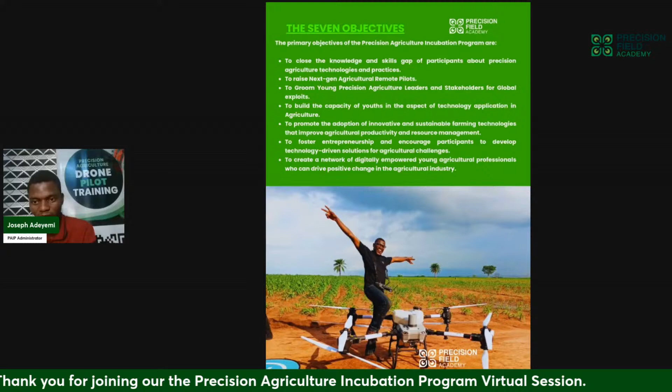Number five is to promote adoption of innovative and sustainable farming technologies that improve agriculture productivity and resource management. Number six is to foster entrepreneurship and encourage participants to develop technology-driven solutions to agriculture challenges. And lastly, number seven is to create a network of digitally empowered young agricultural professionals who can drive positive change in their community through the transformative power of technology.

This program falls into two tracks: the employability track and the entrepreneurship track. So there are two sets of people attending this program. Maybe young farmers who are interested in digital agriculture and have been using Earth observation technologies like Google Earth, Google Earth Engine, and satellite imagery, looking to expand their knowledge on precision agriculture. And secondly, people who want to be employable and possess the requisite skills needed to make them valuable and competitive in their career or industry.

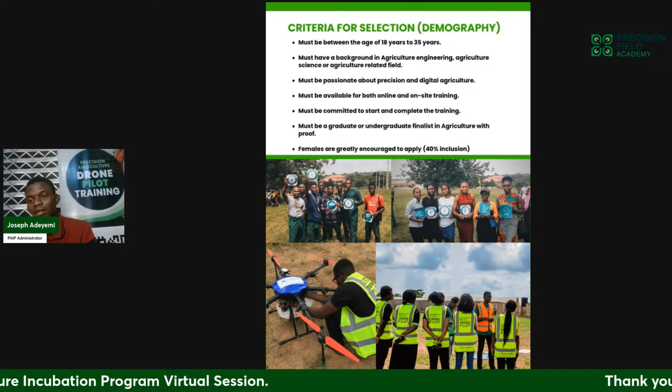So we have the mode of training, which is virtual and in person. For virtual, we have virtual facilitation sessions like this, with online trainings from global faculties around the world. And we have the on-site training, which is the practical field experience, where you get to learn about drone technology, have hands-on experience on simulators, drone building, and some other practicals.

The demography of people we're looking at is 18 to 35 years, because we believe these are still young people, and we need to build the capacity of young people, not old people, but those who can actually visualize a positive future for the future of work in agriculture.

So our focus area number one is drone technology. We're going to be looking deeply into drone technology. Tomorrow we will also have another section on drone technology, which is going to be talking about crop protection, basically, and it will be handled by the convener of the program, Mr.

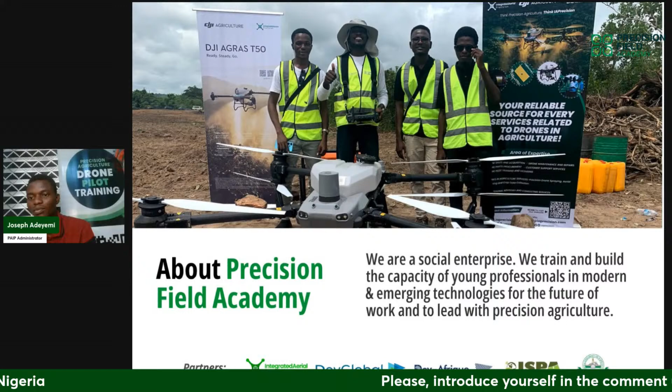We have a core three methodology. Number one is education and knowledge sharing. Number two is training and skill development. Number three is coaching and mentorship.

We have six tech skills in focus. Number one is drone technology. Number two is GIS and remote sensing. Number three is data science for agriculture. Number four is robotics and Internet of Things. Number five is artificial intelligence and machine learning. Number six is enterprise development. All of these skills combine both technical and enterprise skill to make you competitive and valuable in your industry.

So why do we do what we do? What's our motivation for running Precision Field Academy to build the capacity of youth? We understand that there's a skill gap that needs to be closed, and young professionals need to build skills in both technical and enterprise aspects for the future of work in agriculture.

Number two, observing the trend is not enough. Youth need to be an enabler, directly involved in this technology rather than just being mere observers. Lastly, technology is the key to unlock African agricultural potential. We can bank on technology to spearhead our productivity and increase efficiency in the agriculture industry.

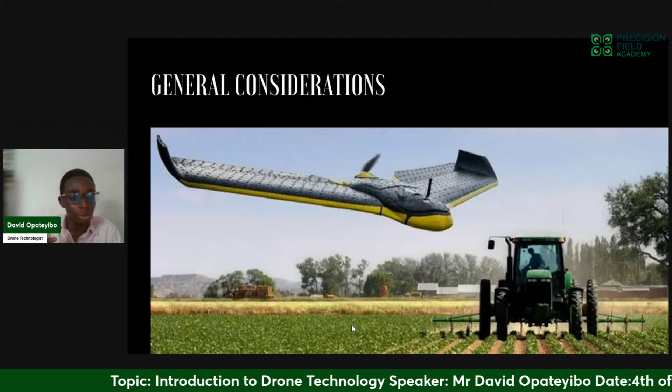We are talking about a machine that actually flies, and most of them are pretty heavy. You can have a drone that weighs over 25 kg. Imagine that drone falling from the sky because the person operating it doesn't understand the regulations or things he needs to do to fly safely. That drone falling to the ground can serve as a projectile, can cause injury, can cause death, can cause damage to properties.

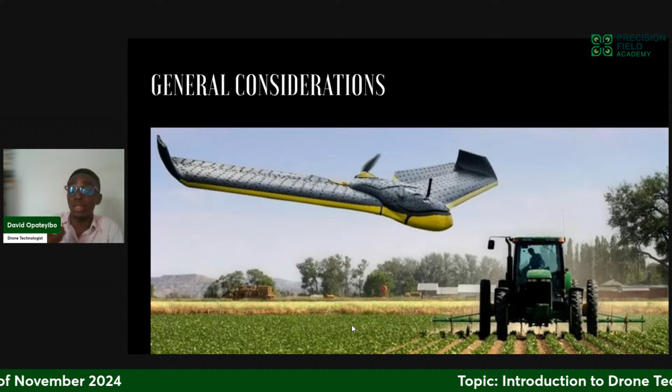So it's always important for you to understand the regulatory framework. These regulations are put in place so that people can safely operate drones without causing injury to themselves or other people, and without causing damage to properties around. So let's look at some of these regulatory frameworks.

When it comes to drone safety, we have general regulations and general laws that apply based on the country that you are in, and special regulations too. General regulations include not flying above 400 feet, not flying closer than 150 meters to buildings, not flying further than 500 meters away from yourself so you can see the drone - that is, flying within visual line of sight.

Not flying close to airports where we have other aircraft, because there's a possibility that your drone can impact the aircraft, maybe damage the engine because you flew towards an aircraft that's currently flying or operating. And many more - so there are quite a number of laws and regulations that apply to the use or flying of drones.

Now, regulations vary from country to country, region to region. So while we have generic rules that apply to the operation of drones worldwide, there are some peculiarities based on the country you're operating in. For example, in the US, the aviation body in charge of regulating drone operations or flight operations is called the FAA, the Federal Aviation Administration.

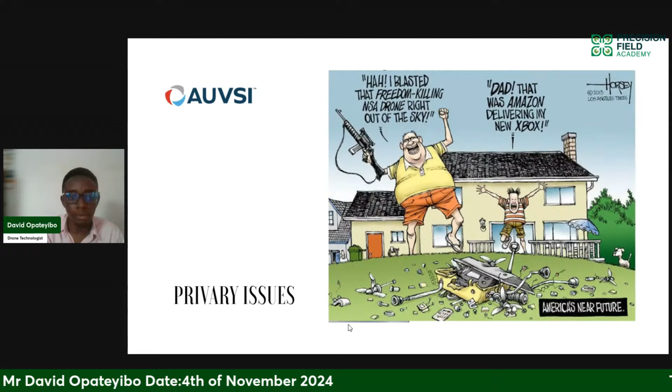Now that brings us to the next thing, which is technical considerations when it comes to drones. Like we already said from the beginning, drones are being used for a lot of things, and we have different categories of drones, different types of drones, and different use cases. So let's dive into the technical aspect of drone technology.

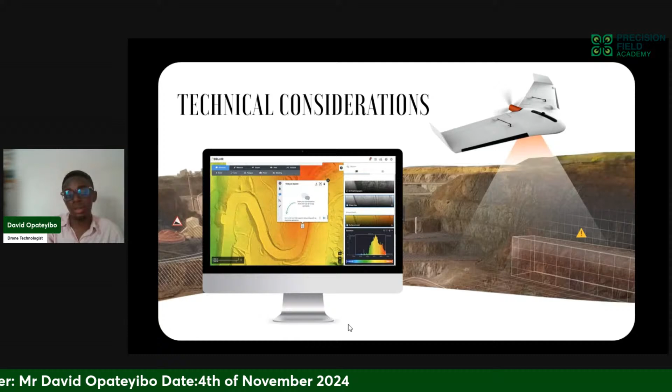Now, when it comes to drones, drones are also known as UAVs. By UAV, we mean unmanned aerial vehicles. So, for example, when we talk about aircraft in the airport, we're talking about manned aerial vehicles. By manned aerial vehicles, we mean that the pilot, the person controlling the aircraft, is inside the aircraft, so the aircraft is manned. But if the person is not inside the aircraft, it is regarded as an unmanned aircraft.

Now, this unmanned aircraft, that is the drone, is actually a subset of an entire system. The system consists of the drone itself and also the navigation system, the communication system, among other things. Drones can be divided into several parts, right? So you have your airframe, your propulsion system, which helps the drone to move, your power system, that is your battery, your communication system, your navigation system, like the GPS embedded into the aircraft, among many other things. So the drone itself is just a sub part of a major framework.

So your major framework now includes the drone, the control system, that is your GCS, your ground control station, and the data link, which is the communication system between your drone and your GCS. But then the drone itself can also be divided into subsections, like the body, the flight controller that allows the drone to carry out the operation, the payload, which is what the drone uses to do work, right? You have your power system, which powers the drone, among many other things.

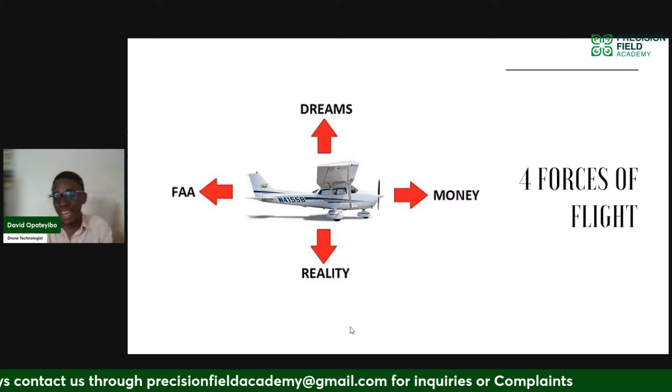Now, these forces are your dreams, your money, FAA, and reality. No, I'm kidding. All right, so we have four forces, and these forces are lift, weight, thrust, and drag.

I'll say it again: lift, weight, thrust, and drag. These forces govern how your drone moves through the air and maintain stability during flight. They are a sub-part of what we call aerodynamic principles.

Aerodynamics is simply the study of how objects react with air, or how air reacts with an object, how objects and air react relative to one another. So you basically have an object, it could be your drone, it could be your hand, it could be your phone, whatever it is. The way it reacts to air when they move relative to one another is what we call aerodynamics.

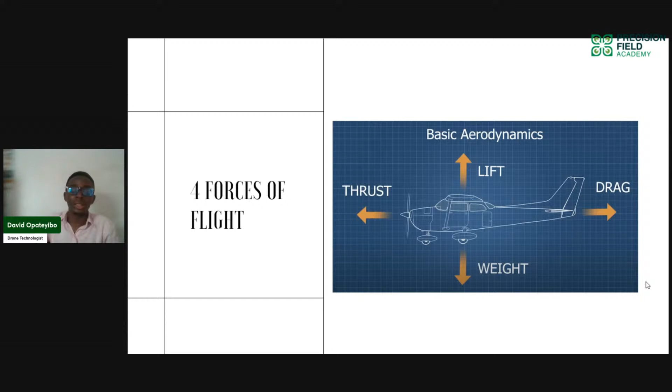Maybe you've been on a bike before, or in a vehicle, and you put your hand outside, and you see that as the car speeds towards the front, your hand begins to move backwards. The study of what is happening there is what we call aerodynamics, simply put.

Now, like I said, we have lift, weight, thrust, and drag. Let's talk about lift. Lift is simply an upward force that pushes the aircraft above the air. So what makes this drone, for example, move from the ground up, is what we refer to as lift. For drones like the one I have here, this lift is generated through the propellers. For airplanes, the lift is generated through the wings, the fixed wings of the aircraft. And for helicopters, it is generated through the rotor blades, that big blade that rotates above the aircraft.

Lift is created through a combination of forces, or a combination of principles. We have what we call Newton's third law of motion, and we have what we call Bernoulli's principle. Those are the two principles we can use to explain how lift is generated.

So let's first start with Newton's third law of motion. How many of you are science students here? Can anybody tell me what Newton's third law of motion says? You can write it in the comment section. What is Newton's third law of motion? Anyone? Okay, not to waste time.

Newton's third law of motion says that for every action, there's an equal but opposite reaction. Action, reaction, action, reaction. For every action, there's an equal but opposite reaction. Let's take this drone for example: by the time these blades begin to spin, because of the way they are tilted or designed, that design is called an airfoil. They have an airfoil cross section.

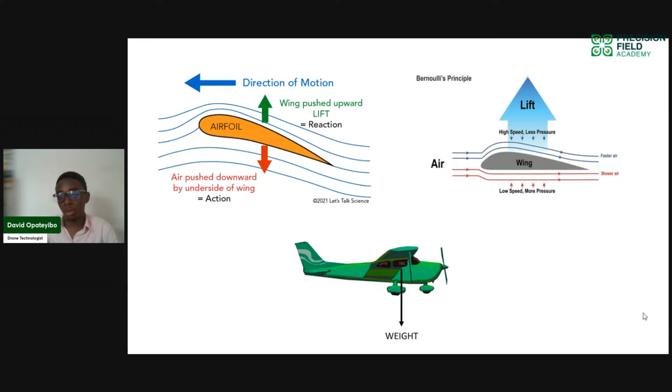Imagine a fire incident in a house. You're ten people in a room with a tiny door. Once the fire alarm goes off, all of you rush toward the door at the same time. Because you're all pushing through at once, your speed is slow, and you won't pass through easily. But even though your speed is slow, the pressure on yourselves and the door increases. If instead you went in a straight line and exited one by one, you'd pass easily without touching the door, moving faster without applying pressure. That's simply how to explain Bernoulli's principle.

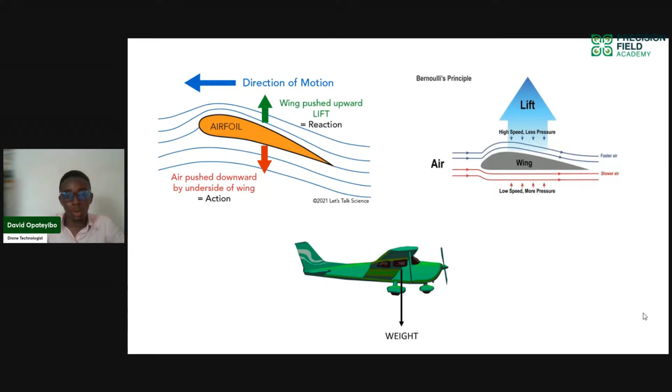Once you have that difference, lower pressure above and higher pressure below pushing upward, it will lift off your aircraft. So what you want to do is create a system where the lifting force is greater than the weight force in order to go up.

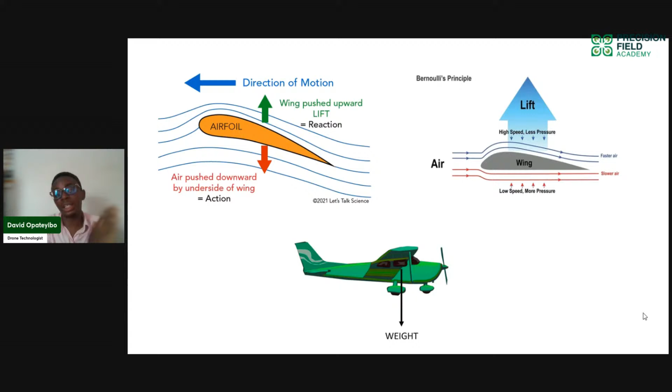That brings us to the other forces, which are thrust and drag. Thrust is the forward force generated by your aircraft's propeller through the air, and this thrust must overcome drag to maintain forward motion. For example, your airplanes have big jet engines attached to the wing that provide thrust and move the aircraft forward. The faster they spin, the more your aircraft pulls forward through the air.

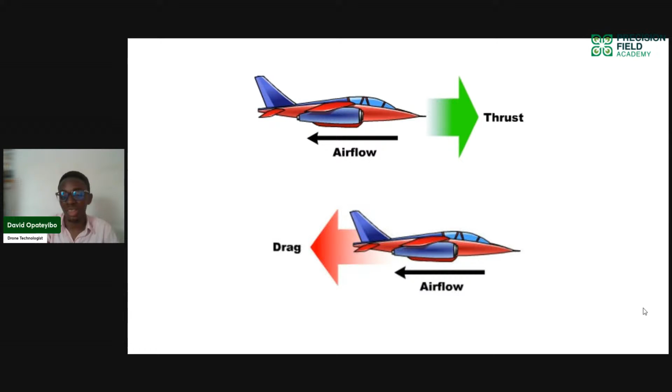Now, because your aircraft is in motion, there is a force that opposes motion, which we call frictional force. Friction is the force that opposes motion. So the resistance caused by friction based on the movement of your aircraft or drone through the air is what we call drag. As your aircraft moves through the air, the air collides with it and tries to slow it down, so your thrust force must be greater than that frictional force for your aircraft to move through the air.

So let's go to the next thing. Your drones actually have the ability to move in three axes, and that helps provide versatility and maneuverability through the air. These axes are what we call the three axes of flight. So you have your drone, and we have our three axes of flight.

The very first one is the lateral axis. Lateral axis is simply an imaginary line. This aircraft, this drone, has a center of gravity, the CG, which is where all the weight of the aircraft is concentrated. Let's assume that to be the middle of this drone. So now we have an imaginary line.

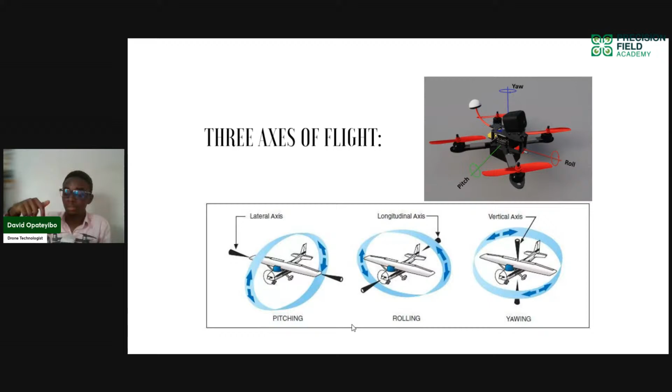We have the lateral axis, longitudinal axis, and vertical axis. Imagine a line that cuts across this aircraft from the right to the left, through the middle. We call that the lateral axis. On this axis, because there's a line like this, my aircraft can go up or down, up or down. Imagine there's a rope here that goes like this, so that makes this drone able to go up and down around that line. This movement is what we call pitching.

So it's pitching forward, pitching backward. That's the lateral axis. Now let's assume another line that goes from the front of this drone to the back, front to back. This line is what we call the longitudinal axis. Across the longitudinal axis, imagining a line cutting this aircraft in half from front to back, allows this drone to go left and right. We call that rolling. This aircraft can roll to this direction and then roll to this direction.

And then we have what we call the vertical axis. Imagine a line that runs from the top of this drone to the bottom, top to bottom. That line allows this drone to move side to side, clockwise or anti-clockwise.

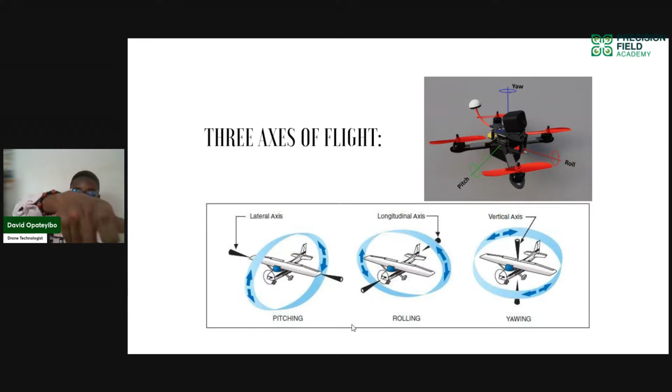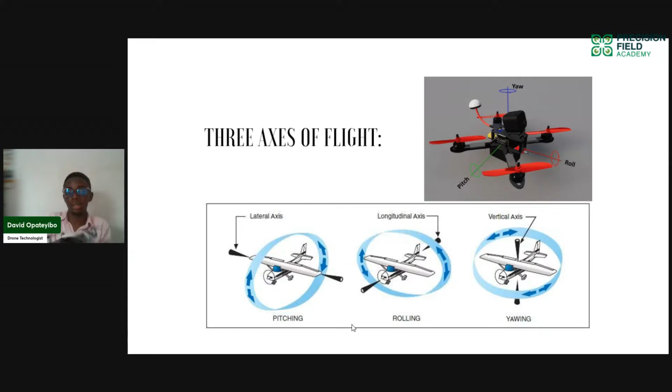So imagine three lines. You have one that cuts across from side to side. If there's a line that cuts across side to side, this drone can then go either forward or backwards - that's pitching. You have one that goes from forward to back, and then this drone can go this way. Then you have one that goes up to down, and then this drone can go this way. So just imagine you have those three lines, and this aircraft is able to rotate around each.

So if I have this line, the aircraft is able to rotate this way around this - that's if you tie the rope. If you tie the rope to this thing, this aircraft will be able to go like this. If you tie the rope this way, this aircraft will be able to go like this. If you tie the rope this way, this aircraft will be able to go like this. Those are the three axes of flight.

And that gives us three movements. You have your pitching, which is forward and backward. You have your rolling, which is rolling left and right. And you have your yawing, turning clockwise and turning counterclockwise.

I know it's a lot, but just take it in little by little.

Now, this is pretty much how a multirotor is going to move around this object. Your fixed wings, for example, rely on control surfaces to move around this axis. Meanwhile, your multirotors control this movement through what we call thrust differentials. This is what I will explain next.

Thrust differential is simply the adjustment of the speed of each of these four motors. It adjusts the speed of these motors to determine how it's going to move about those axes.

But for your fixed wings, like an airplane, if you've been in one, you see there are surfaces on the aircraft that move while it's flying. On the wing, something goes up and down. The other wing, the same. Same at the tail of the aircraft. That's what allows it to determine how it's going to move.

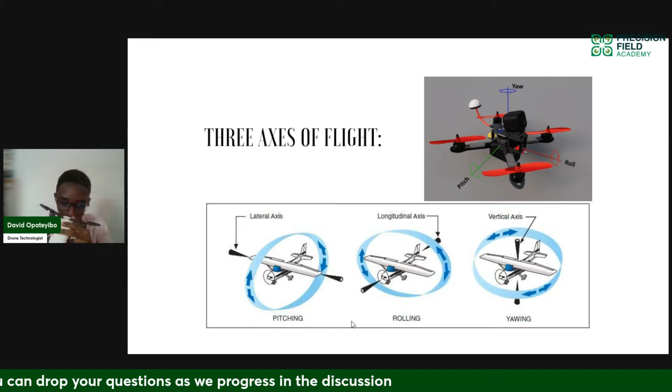All right, so let's talk about drone operations. In this section, we'll delve into the world of drone operations. How do we actually control or fly this drone? We'll be sticking with the control of multi-rotor drones.

Now, all drones generally have four controls for their movement. We have throttle, we have yaw, we have pitch, and then we have roll. Throttle, yaw, pitch, and roll.

In this section, we'll be looking at how multi-rotor drones are controlled. The reason is because multi-rotor drones are actually the most common drones in the marketplace today, and also they are the starting points for many enthusiasts and farmers, because of their simplicity and stability. Of course, they come in different sizes and shapes, but their principle is pretty much the same thing.

Now, when it comes to your multi-rotor drones, like I said, we have what we call throttle, you have your pitch, you have your yaw, and you have your roll.

Your throttle simply controls the speed of all motors simultaneously, thereby determining the altitude. So we have 4 motors here, 1, 2, 3, 4. When you increase the throttle of your drone, you're increasing the speed of these 4 blades equally, simultaneously, at the same time. If I decrease my throttle, all these 4 motors are going to decrease speed at the same time.

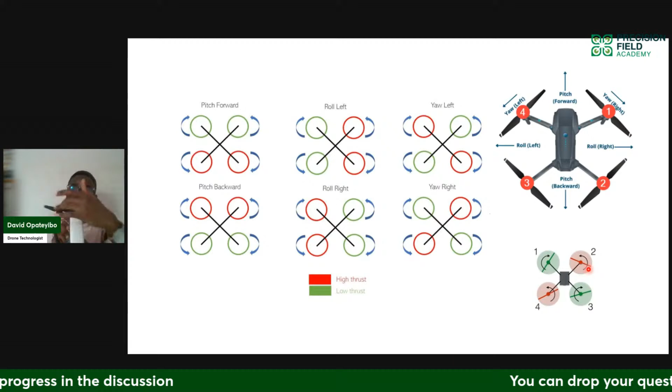The reason is because for your multi-rotor, for example, you have multiple rotors that are rotating clockwise and counterclockwise, which means they're countering themselves. That's what allows you to become stable. Your helicopter only has one major blade, that big rotor blade in front, and that thing can only rotate in one direction. So let's say it rotates clockwise. To counter it, they needed a tail to provide a counter force so that the body of the helicopter does not keep spinning in the other direction. So once you take away that tail, the helicopter will begin to spin in the opposite direction, and because that is not stable, it's going to crash.

The multirotors are easy because now you have two motors rotating clockwise and two rotating counterclockwise. So when I'm applying throttle, which allows the drone to go up or come down, I have two blades rotating clockwise. Let's assume I put them at 50%. So these two blades are rotating clockwise at 50% speed, and these two blades are rotating counterclockwise at 50% speed.

Because this clockwise blade is rotating clockwise, this drone will want to rotate anti-clockwise. But then I have two other blades rotating anti-clockwise that want this drone to rotate clockwise. So this is saying rotate clockwise 50, this is saying rotate anti-clockwise 50. 50 minus 50 equals 0. So your drone will stay on a spot, but increase speed and decrease speed.

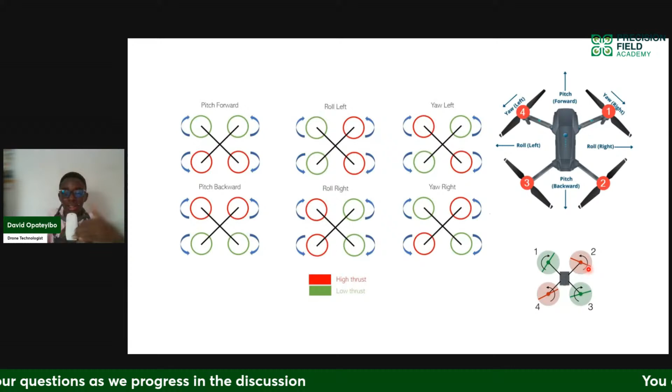That allows this drone to stay straight and just go back. I'm decreasing the speed of a clockwise and anti-clockwise blade like this, increasing the speed of a clockwise and anti-clockwise blade like this equally. That allows this drone to stay straight and just go like this or go like this.

Now, for me to yaw, which is to turn, what I'm doing is increasing the speed of the clockwise blade and reducing the speed of the anti-clockwise blade. So if I increase the speed of my clockwise blade, I've increased the reaction, which is anti-clockwise reaction. So my drone is going to turn the other way, anti-clockwise. You get it now? This drone is now going to turn this way.

Now, if I increase the speed of the anti-clockwise blades, it means I'm increasing the clockwise reaction. So my drone is going to rotate clockwise. The difference in speed of the clockwise blade and the anti-clockwise blade will determine how fast my drone is going to spin clockwise or anti-clockwise.

And then if I want it to be stable again, all the speeds of the motors will rotate equally. How would that make sense? Now the thing is, if you are to do this and control it by yourself with your hand to fly it, you have a lot of issues. And that's why there's a flight controller.

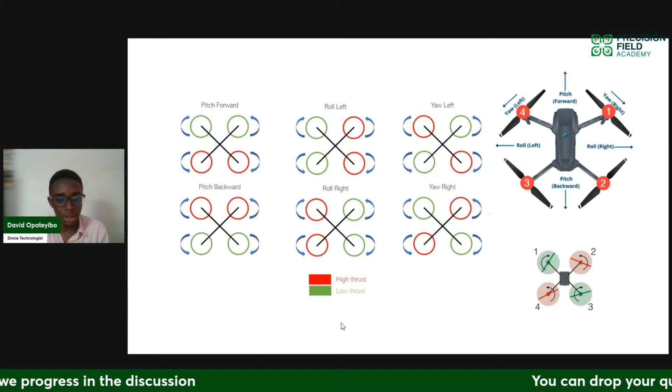So for example, now for you to control this, make use of a radio transmitter to control these operations. Now we have different kinds of transmitters, so we have like 5 channels. You have channels for your transmitter. Remember I said we have 4 controls on your drone: throttle, pitch, yaw, and roll. That gives us 4 channels.

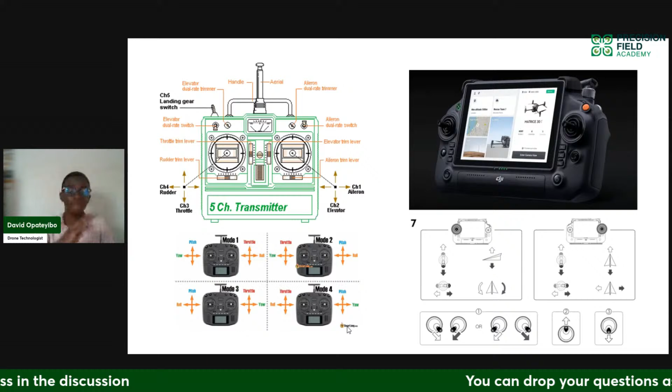Hello, Mr. David, I don't know if you can hear me. We can't hear you again, so it's hanging. Your video is hanging, I don't know, it can be a result of network. So if you can hear me, probably you try and give a recap of that part.

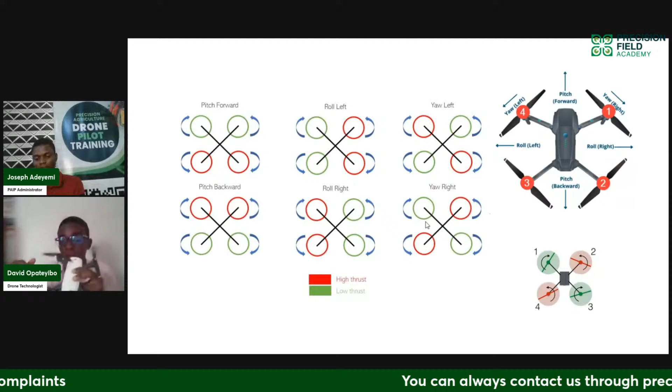Okay good, so like I was saying, your drones pretty much work on speed differentials, right? We have four motors, and we reduce or increase the speed of these motors to determine how we move. So for your pitch, for example, to pitch forward, by decreasing the speed of these two forward motors and increasing the speed of these two backward motors. If I increase the speed, I'm increasing my lift, so the back is going to raise up because it has more lift. This front has less lift, so it's going to go down, and then the reactive force will push this drone forward.

The opposite happens for me to move back. Now for me to go to the left or right - to roll to the left, the speed of these left motors decrease, so I go in this direction, and the opposite happens here. These motors that raise up, the speed increases compared to this motor, and that causes this drone to move this way, that's how you roll. For throttle, the four motors spin at equal speeds. So if I increase the speed of the four motors simultaneously and equally, the drone goes up. If I decrease the speed equally and simultaneously, the drone goes down. That brings us to your yaw movement.

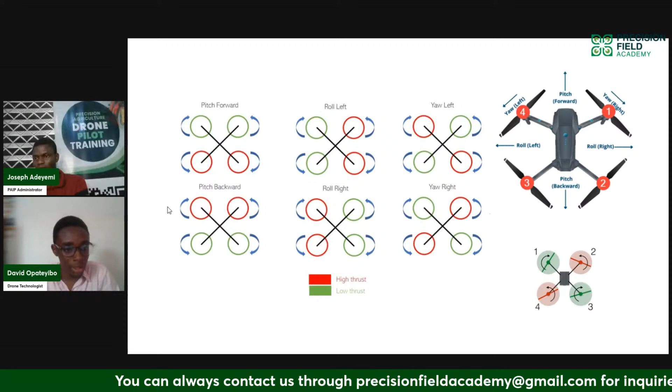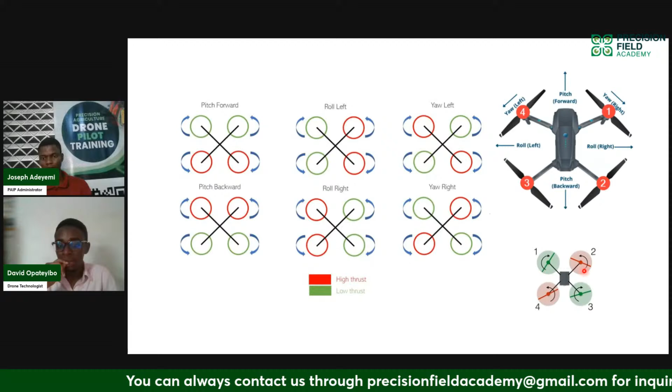Now, to explain yaw, you need to note that these four blades, these four motors do not rotate in the same direction. I'm going to use this image here on my screen to explain, you can see my laser pointer. So I have four motors here, and you will see that the ones labeled 1 and 3, the motors are rotating clockwise, while 2 and 4, the blades are rotating anti-clockwise. The reason for this is because, using Newton's law of motion, for every action there's an equal but opposite reaction. If all these blades were to rotate in the same direction, let's say clockwise, the reaction will be an anti-clockwise reaction, so this drone will rotate in the opposite direction.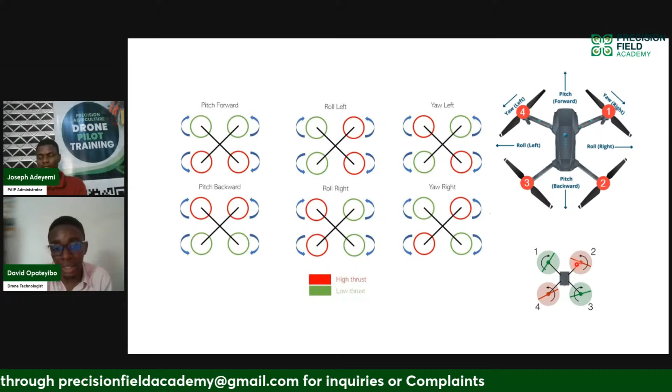So if these motors are rotating clockwise, the drone will rotate anti-clockwise. If all the blades were rotating anti-clockwise, the drone itself will start rotating clockwise. That will cause imbalance and you'll not be able to control the drone, and that's why we have two blades rotating clockwise, two blades rotating anti-clockwise. If you look at them, they are opposite each other, that is to create balance.

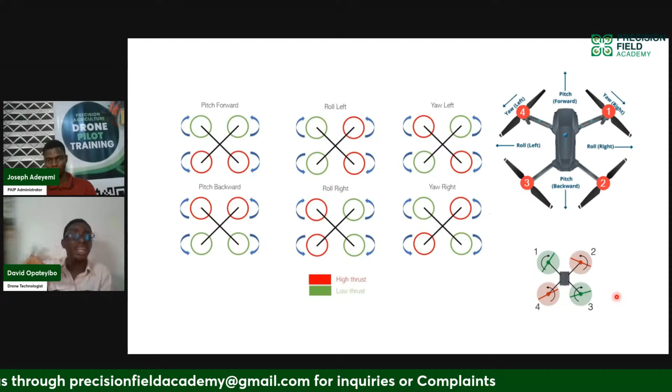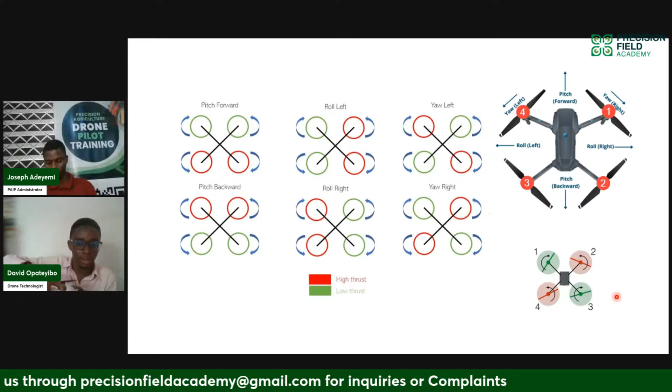So for you to yaw, what is happening is you are increasing and decreasing the speed of the clockwise motors or the anti-clockwise motors. If I increase the speed of my motors that are rotating clockwise, which is the action, I have an anti-clockwise reaction, meaning my drone will rotate anti-clockwise. If I increase the speed of my anti-clockwise blades, I will have a clockwise reaction, which will cause my drone to rotate clockwise. I believe that makes sense.

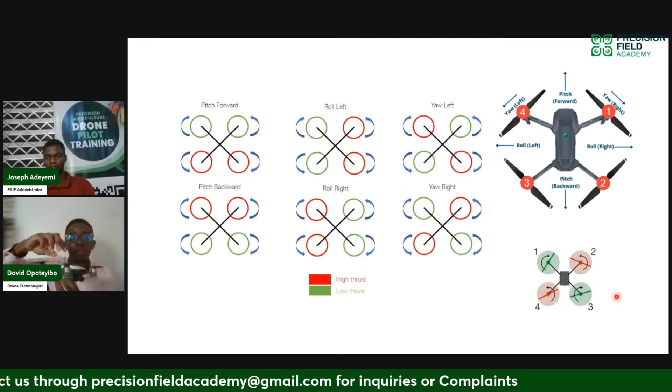So the more the difference between those speeds, the faster my drone is going to rotate in either direction. If the difference is small, my drone will begin to rotate clockwise or anti-clockwise slowly. If the difference is much, my drone will begin to spin, just like you see in helicopter movies, because your helicopter just has one big blade and not multiple blades, that blade only rotates in one direction. That's why your helicopter has a tail rotor to counter that reaction. If you've watched movies where they shoot the tail of the helicopter, you notice the helicopter begins to spin abruptly till it lands and crashes, because what?

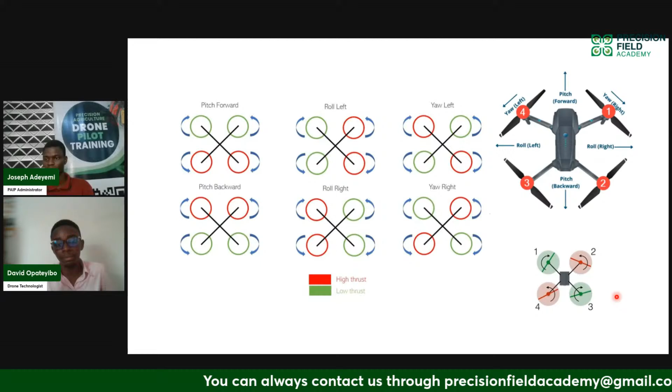It is not stable, that's pretty much how it operates. For us to control this, it's very difficult for you to control the speed of all these four motors manually, and that's why we have a flight controller inside the drone.

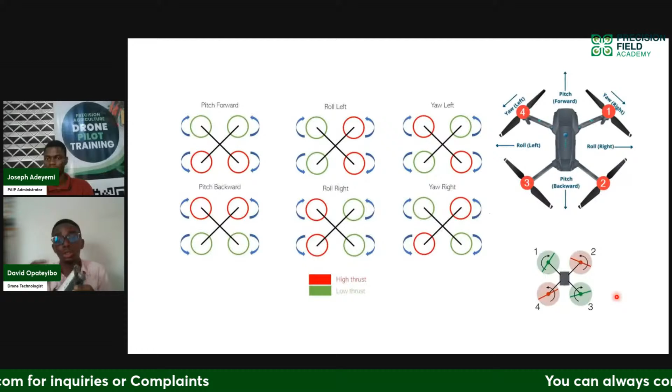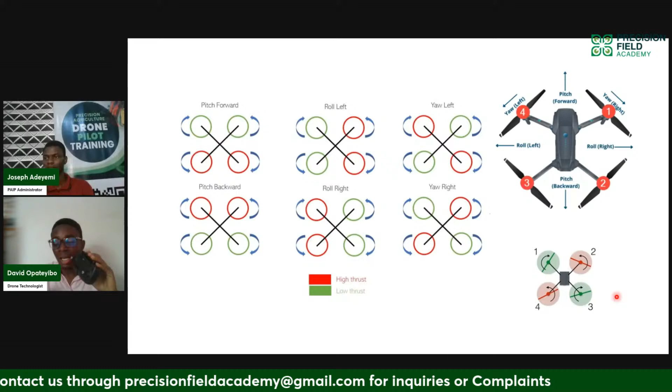To control this, you have your controller, which is your transmitter, something like this. Your transmitter sends signal to your flight controller. Your flight controller interprets that signal and sends the necessary command to your motors all by itself. So you don't have to worry about which motor is spinning in which direction. The flight controller handles that by itself, provided your blades are put on your drone correctly.

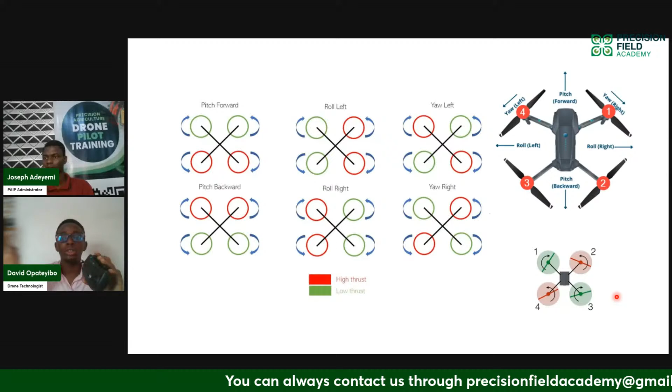Now that brings us to our transmitter. We already said we have four major controls for your drone: your throttle, your pitch, your roll, and your yaw.

Each of these controls are assigned independent channels. So, for example, I have this controller with me. This movement up and down is one channel, this movement left and right another channel, this movement up and down a channel, this movement left and right another channel. That's four channels.

Now depending on the way these channels are assigned to each of these four commands, I can have my throttle here up and down, I can have my yaw here left and right, my pitch here up and down, my roll here left and right. This configuration is called a mode 2 setup or mode 2 configuration.

We have other modes too - mode 1, mode 2, mode 3, mode 4. Not to complicate anything, we'll just stick with mode 2.

So mode 2, simply put, you have your throttle, you have your yaw, you have your pitch, and you have your roll. So when I take my throttle stick and go upward, I'm telling this drone to ascend. When I go downward, I'm telling this drone to descend.

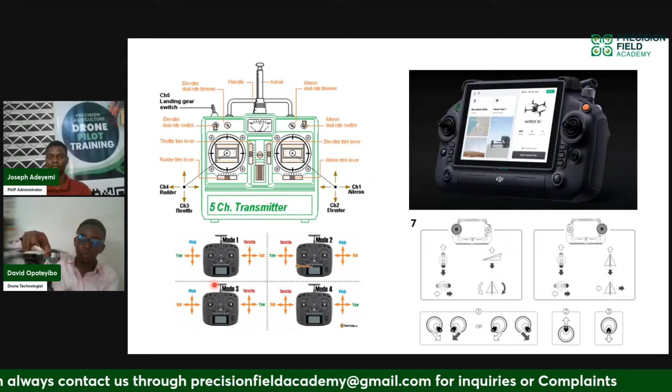If I take this stick and take it to my right, I'm telling this drone to rotate clockwise. Take it to my left, then this drone rotates anti-clockwise.

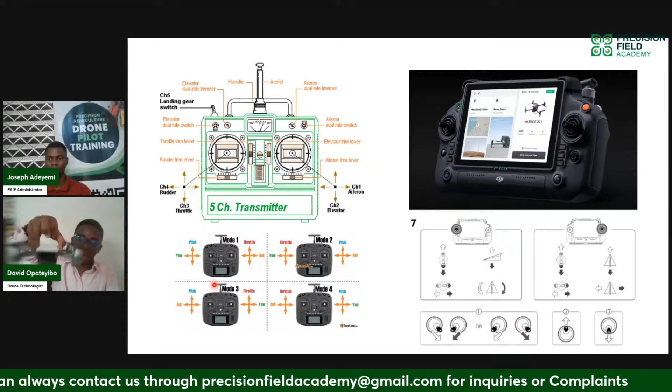If I take this other stick, which is my pitch control, and say up, I'm saying this drone should pitch forward. If I say back, I'm saying this drone should move backwards. If I say move it right, this drone should go to the right. If I go left, this drone should go to the left.

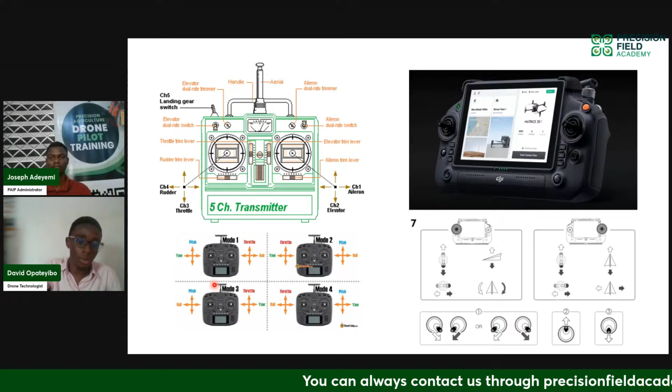That's pretty much it. Now your transmitter can come with more than 4 channels - we have 5, 6, 7, 8, 16 channel transmitters. Simply put, all these extra channels allow you to carry out extra functions.

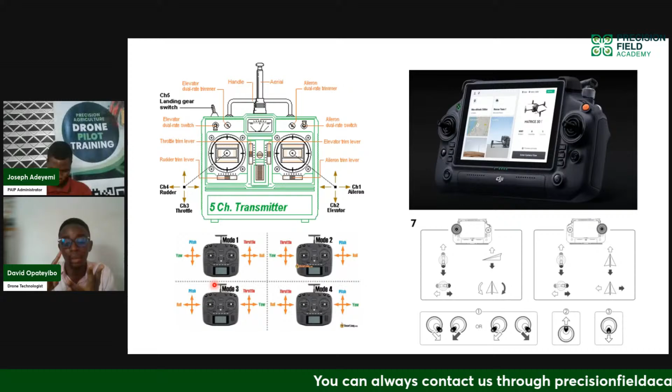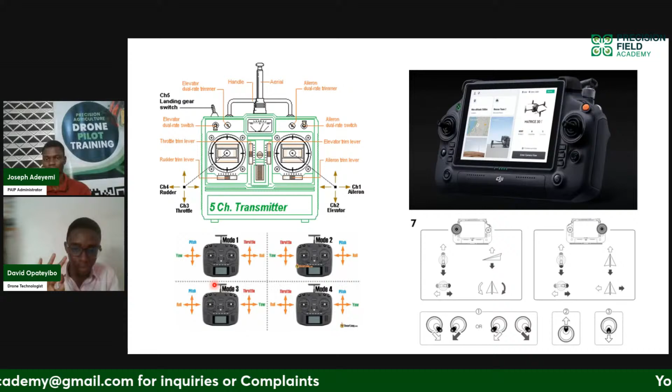For example, controlling your camera, snapping pictures, turning on and off an auxiliary light. If you have a spray tank, powering on your sprayer, turning off your sprayer, among many other things. But practically for your drone controls, you have just 4 major channels.

David, you are up again. Hello, Mr. David, you are up again. I don't know, it's your network or something.

Sorry everyone. Mr. David is currently off again. The network has been really crazy. Let me try and see where to bring him, so we can just entertain question and answer, then we wrap it up.